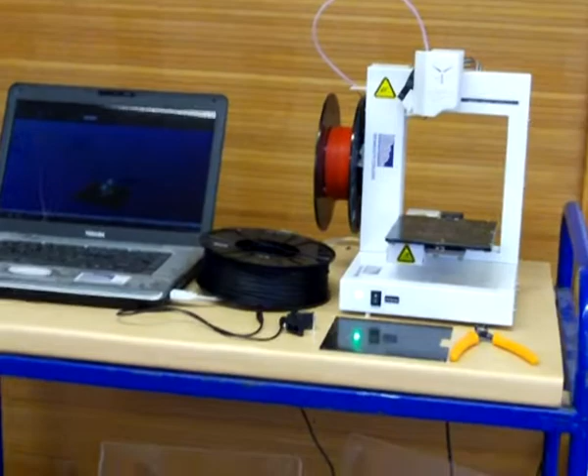Just going to have a go at making a little ad hoc film here about the Up Plus 2 3D printer supplied to us by Denford. We've got the supplied software here up and running on the PC.

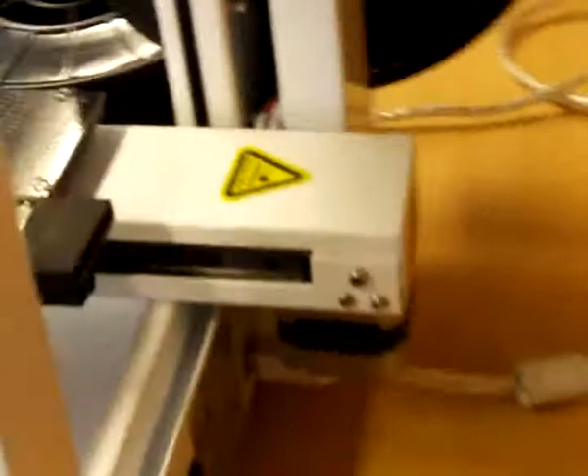What I'm going to do first is initialise the machine. What you need to do is turn it on at the back here, there's a little rocker switch. Okay, so that's turned on now. What we need to do now is go to Print and Initialise. You only need to do that once when you turn the machine on, and like all CNC machines, the equipment's going to run through homing its 3 axes.

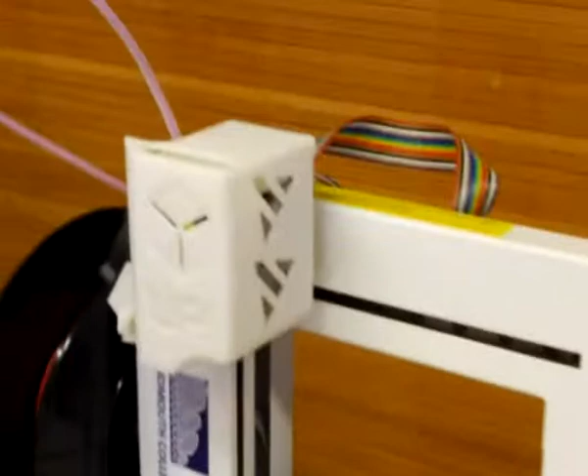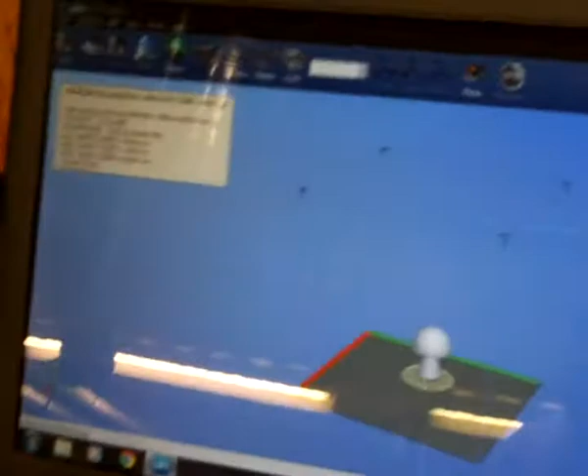Now I've got a couple of door handles here from a previous job. What I'm going to do is get rid of those. You click on them and then go up here to unload, and as if by magic they disappear. So that's ready for loading the next job.

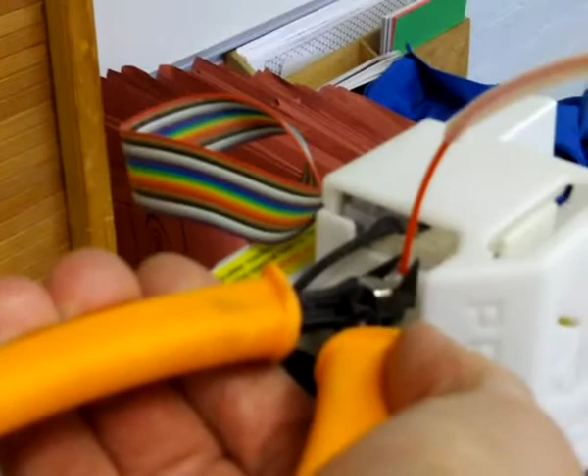Next, I'm going to change the colour. I've got red on there at the moment, and I'm going to change it to black. To change the reel, what you do is very carefully snip the material off here and remove.

No, I didn't want to do that, did I? Put a new reel on here. Not sure how this is going to come out, working one-handed and holding the camera with the other hand.

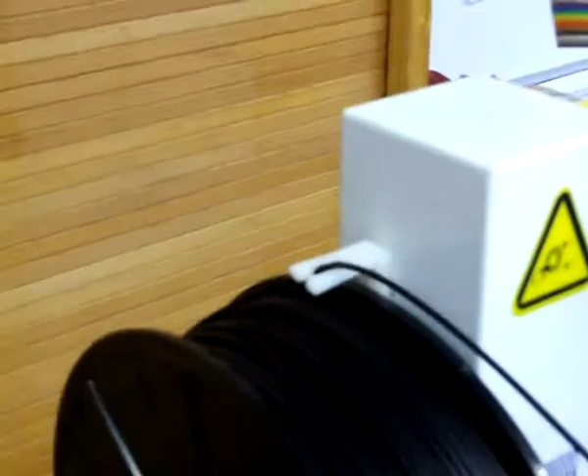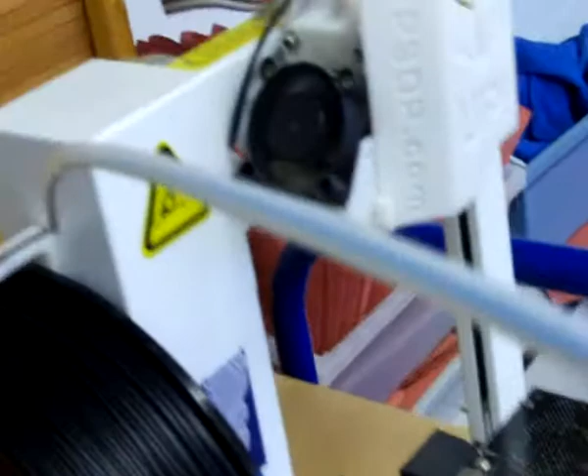We'll see. Got this thing here called a Bowden, and what you do is you feed that onto here. Excuse me while I just point the camera elsewhere. I'll feed that on. This is probably going to look really amateurish while this film comes out. There you go, look, I've got the new material and the Bowden here going back to the reel. Okay, fantastic. And if you look on here, there's the little stub from the red material that I cut off.

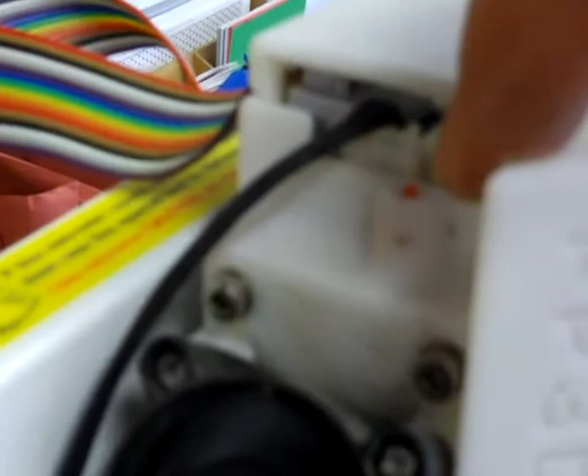Now, to get the new material to feed through the machine, what you do is you go onto Print here, you go down to Maintenance here, and then you click Extrude here. A little audio signal.

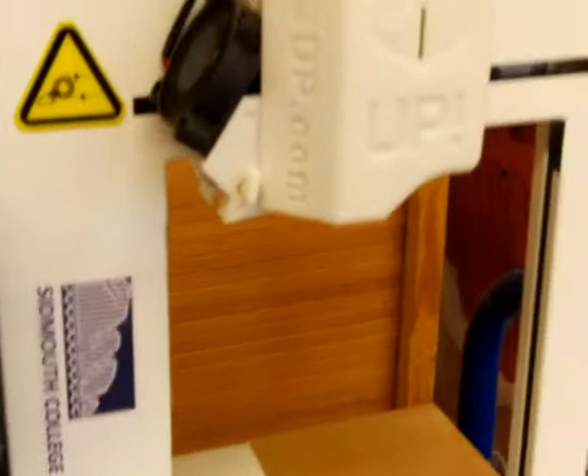Now we'll need to wait for a couple of minutes. What happens is the heater, the nozzle, will heat up here. We'll get an audio signal and the little piece of red material will disappear, and what I'll do is feed in the black material.

Yes, there's that old saying, a watched 3D printer never extrudes its material. I don't know if you've got that audio warning there. That's disappeared. And it's starting to extrude out of the nozzle here. So what we're going to do is get this little piece here and feed it in here. And in a little while we should see the red change to black.

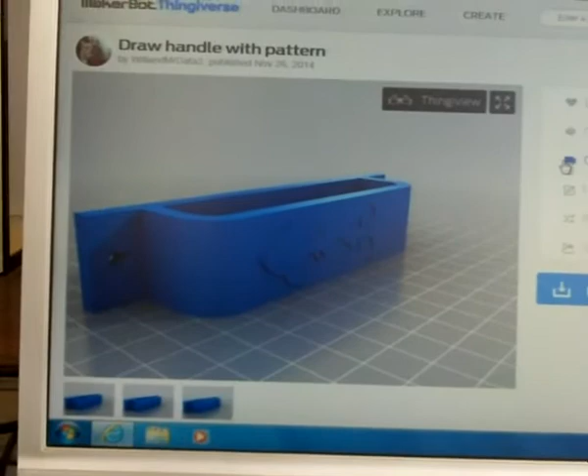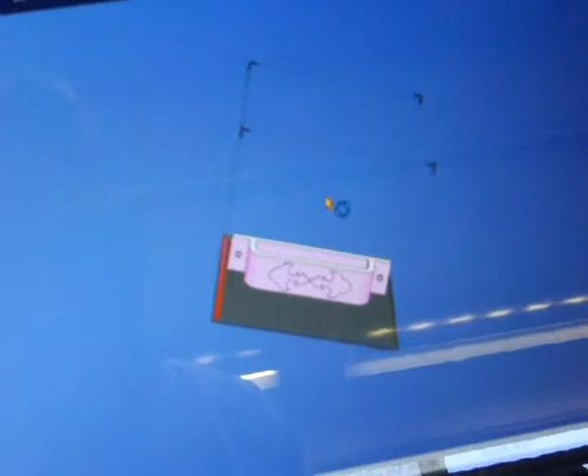I finally found the handle that the student chose, so I'm going to attempt to download this thing. What you're looking for with the Up Plus 2 is an STL file. Right, okay, I've downloaded the handle from the internet. I've uploaded it to this program here.

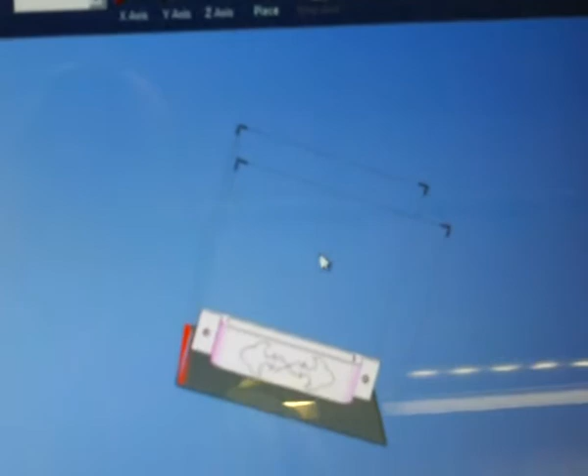So I'm going to print now. All we do is we go print. We've got some different settings here: normal, fast and fine, not very technical, but you get the picture. Click OK to that. I should get another little box open up in a minute.

Right, got this next box: 'Part material not enough, add more material?' Right, don't know what that means, but we just always click no, and things seem to work fine.

So that blue bar moving across there is the drawing being converted into the codes that will control the 3 axes on the machine. Got another little box here telling us the time it's going to take and the weight of the material, and what time it's going to finish. It's all clever stuff, so we click OK to that.

I don't think you need to click OK, I think actually it just does proceed. We can see here the nozzle is heating and the platform is heating. When they get to the prescribed temperature, we'll get a little audio warning and the machine will start.

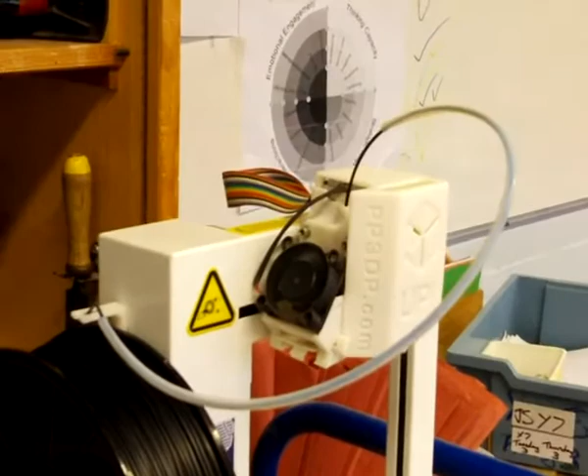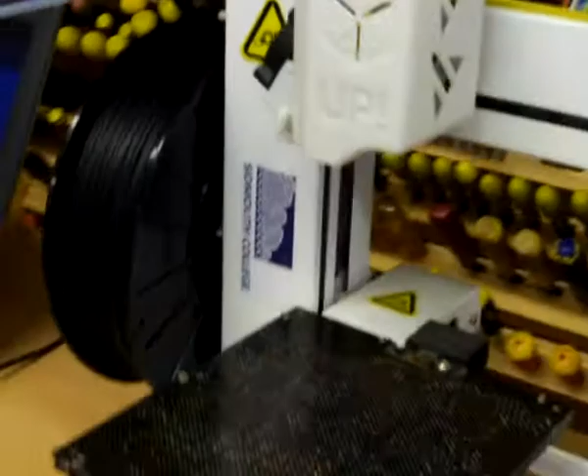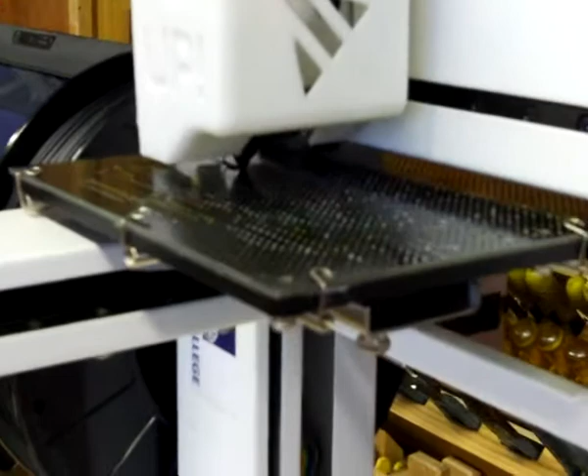Typical, the camera... oh no, that's it, that's good. I was going to say typical, the camera was switched off and we got the audio warning, but I remember now there are 2 audio warnings. Now I think what the machine does first of all is extrude a little bit of the material just here, I think just to get the nozzle unblocked.

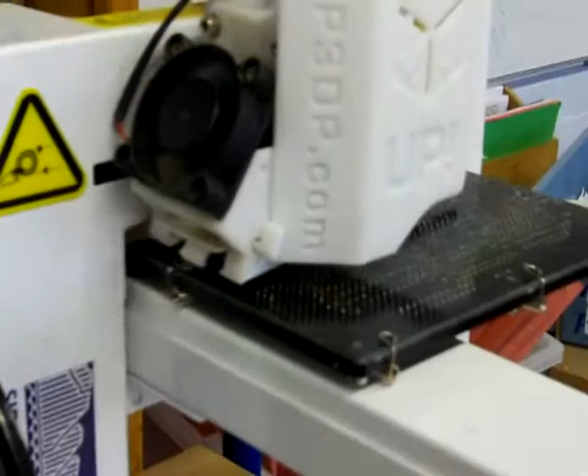Seems sort of logical to me. Now the machine is laying down a little base, which is quite loosely constructed compared to the rest of the material that extrudes for the actual handle or object you're going to make.

I believe it's called support material. This is what you get for your money in terms of a toolkit. Got a little pair of side cutters there, some Allen keys, some screws, washers and so on. We've got a little socket wrench here, a manual and something else.

Please read before opening. These are the bases that go on the heated table, you get 3 of those. Here's some bulldog clips, that's another method for holding these in place. There's various things you can do there to hold them. You've got a pair of gloves here.

I presume you get these because you get this really quite sharp scraper for getting your finished work off of these baseboards, you'll see that later on. Got a knife, that's not the original one though. A pair of tweezers, I added the toothbrush because you do need to clean some of the feed mechanism for the material. Don't get the toolbox, that came from Lidl, it wasn't very good though because I had to put cable ties on to stop the lids coming off.

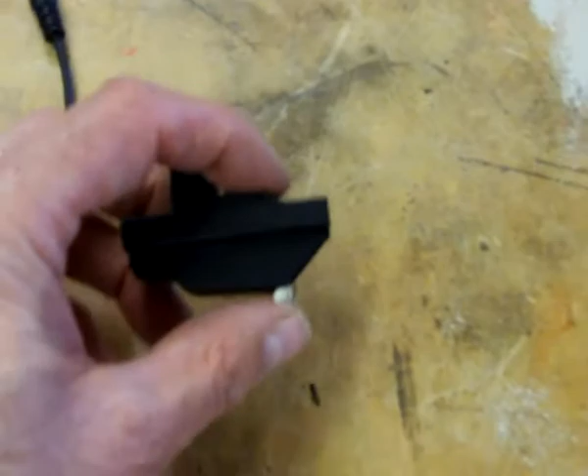It's got that little micro switch there, and imagine that's on the machine, I'll demonstrate this later. You plug this cable into it here and the other end into the machine, and then this goes around and touches the base, not quite as quickly as this though, in 9 places. And what I presume that does is any discrepancy in level, height, trueness, etc. is factored into the program.

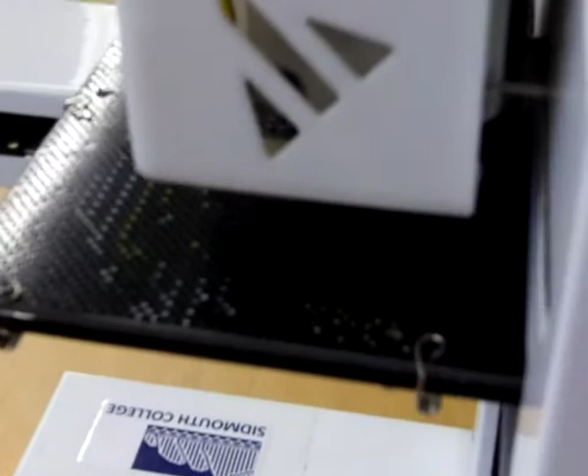Now this wasn't a really very good choice of colour for the demonstration, but I can see it's building this quite nice little base here. What I'll do is come back from time to time and take some pictures of the work in progress.

Here's just a few of the things that have been printed. This is Yorick, apparently he was a man of infinite jest. This little bearing thing here - believe it or not, this was printed assembled. That's just so fantastic.

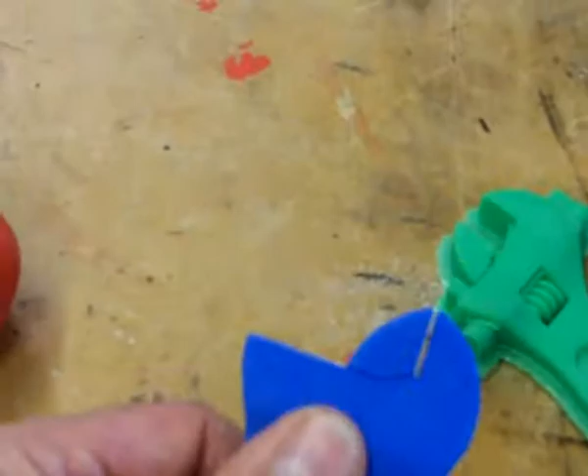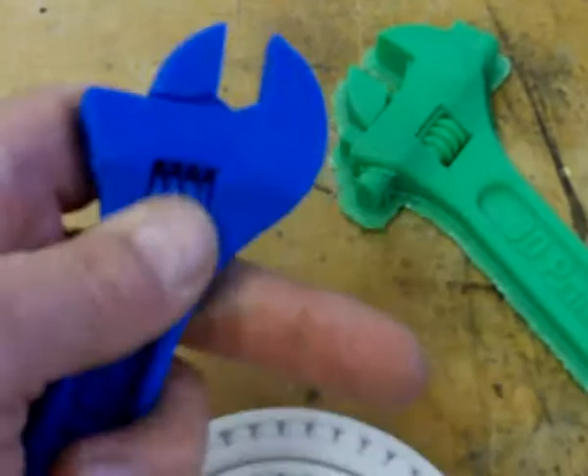Now look, you've got this support material here. Look, here we go, look - here's a spanner, an adjustable spanner. Look, that all works, again that was printed assembled. What you did have to do was cut off this support material on here. This is probably a better example.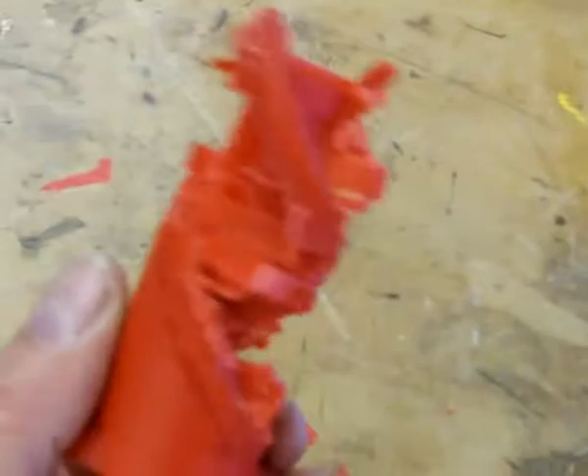This is DNA, or a section of a DNA strand, and look, it looks like a real mess here, but it's halfway through having the supportive material picked off. Carry on with that sometime. Got a hinge here. Okay, and my favourite, this little engine.

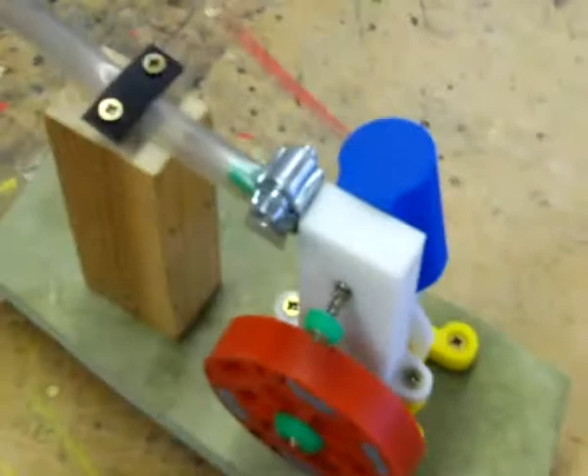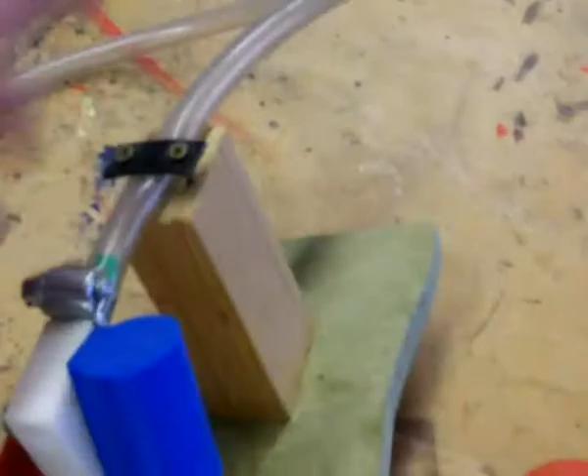Now all these parts were printed separately, then assembled with some screws and glue. If you want to see a video of this running, I think I've got it on my YouTube channel, or if you visit Sidmouth College you'll see a video I made of this. Now it seems so robust for what it is. Fantastic. These are just a few of the things we've printed out.

These are the spools of material. This is ABS, and this is what Denford call a rainbow pack - 1, 2, 3, 4, 5, 6 mixed colours.

Now I've got a little tip for you here. If you're getting to the end of your reel, what you need to be careful of, which I haven't read about or seen anyone else talk about, is the end of the reel is fixed into one of these little holes here - this one's actually come out. This makes absolute sense, because if they didn't fix the end of the material, they wouldn't be able to wind it onto the spool, would they?

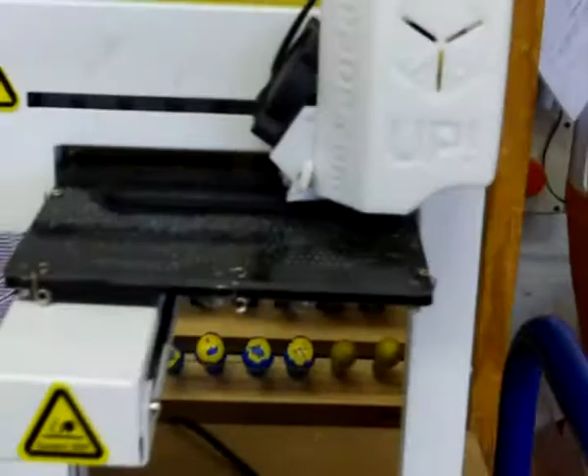Now that's all well and good. When you get near to the end of your reel, you could be halfway through a job, and of course there's the material feeding in through this thing which we call the Bowden, to here, and the reel's free to turn. But you can imagine when you get to the very end, it locks up, and what happens is the machine is going through the motions, but no material's being fed through. Just a little point to bear in mind.

It's the bell for lunchtime.

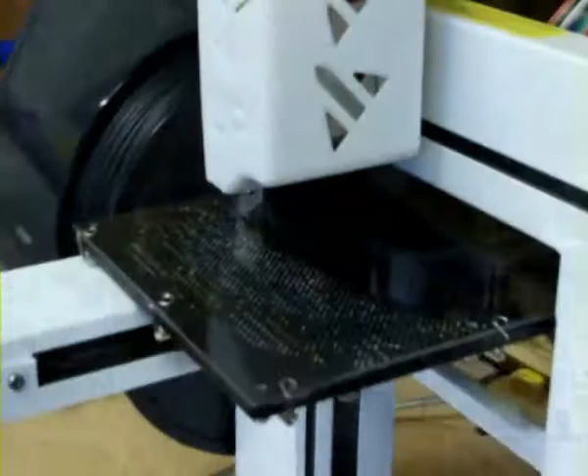This is the progress so far. I don't know if you're getting that - there's the lack of contrast between the table and the chosen material. That's after about an hour, I reckon about an hour and a quarter that's been running.

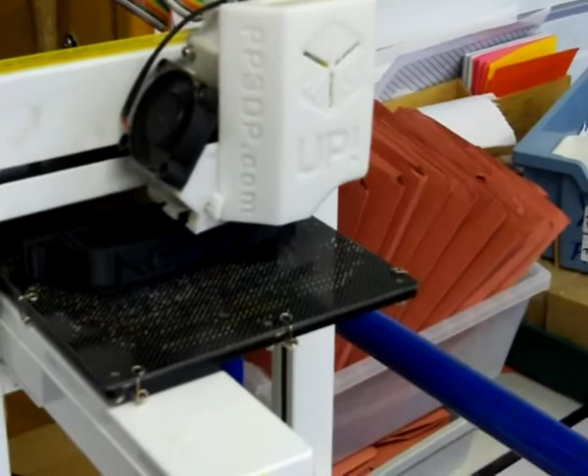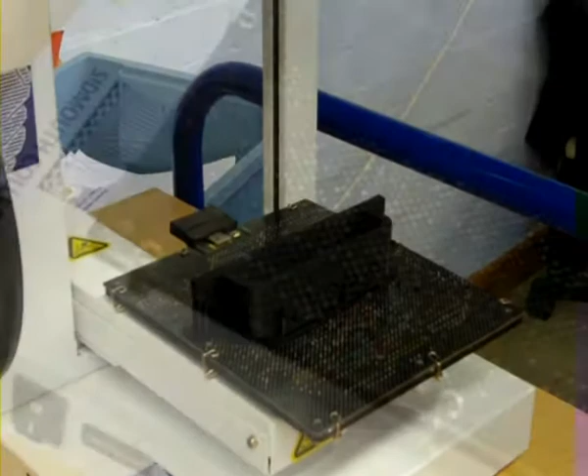Is it finished? Yeah. Are you sure about that? Yeah. Definitely? Yeah. Good. I'm now going to remove the false bed here, or base, or whatever, so we can take this lovely artefact off the machine.

There it is. Put it into the sunlight so you can have a better look. Can you see it there? There you go.

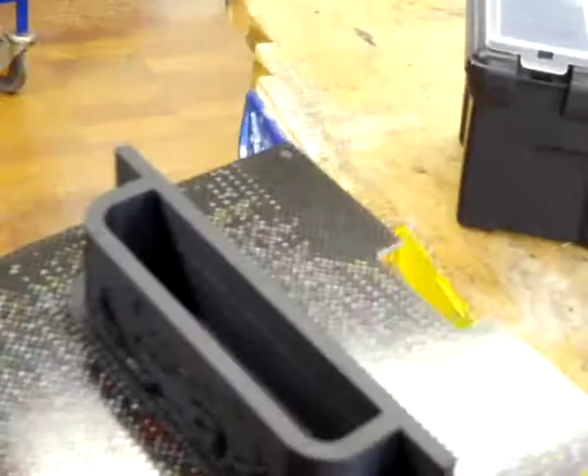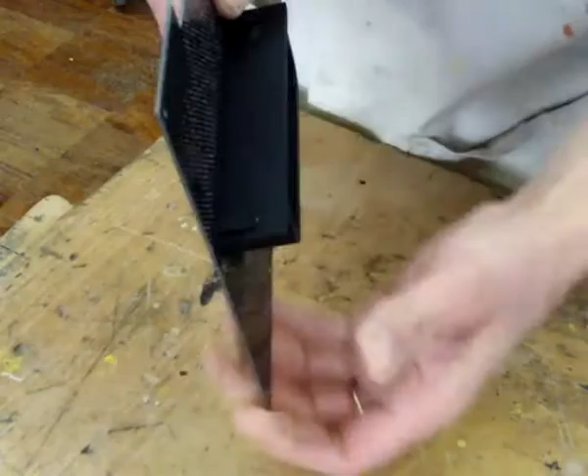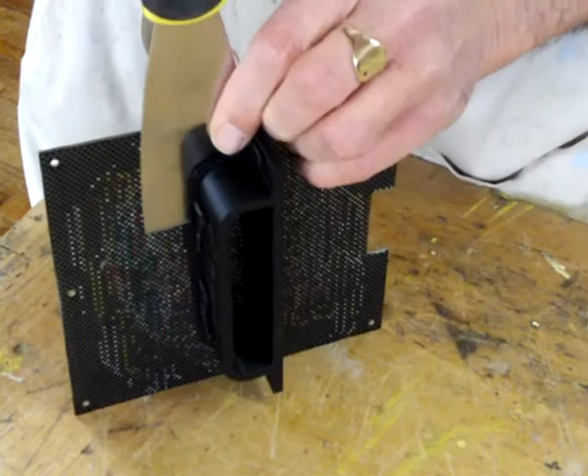Okay, now what I'm going to do here, I find if you give this a little bit of a flex, flex it a little bit, it starts to come off, and you can get the supplied scraper in the back here, and prise off your artefact.

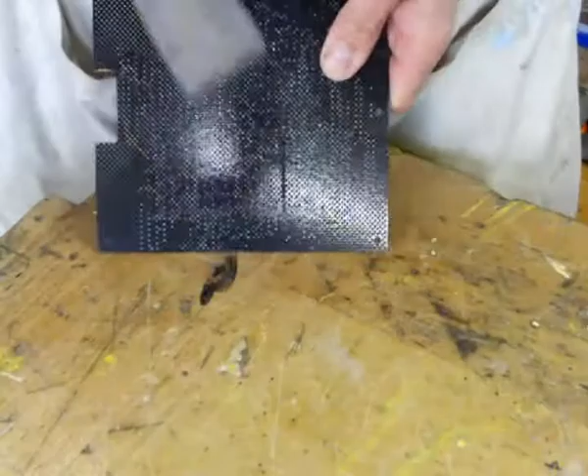What I do is give this a clean off, ready for the next piece. Okay, both sides, because some of the material comes through. There's loads of little holes in here, and some of the material pokes through, which is going to cause the bed not to be flat.

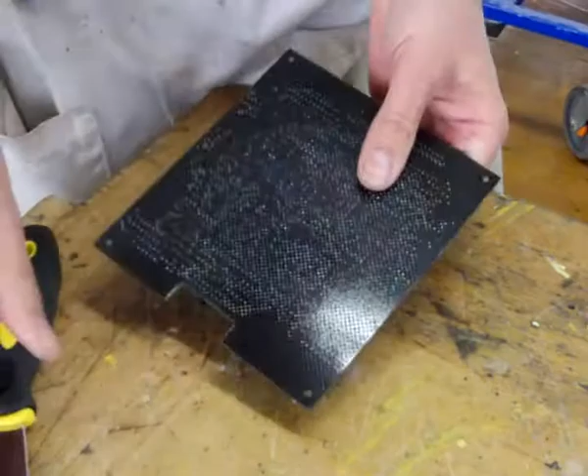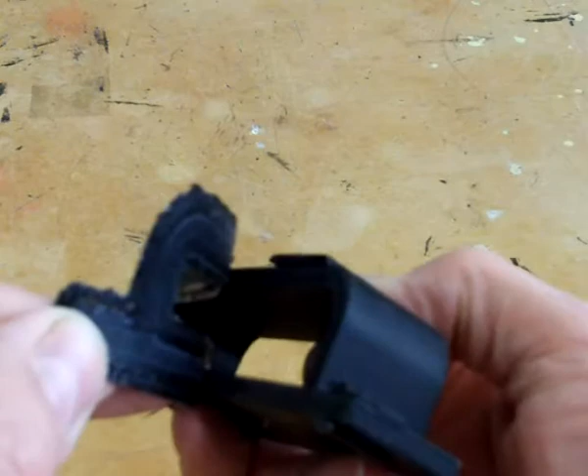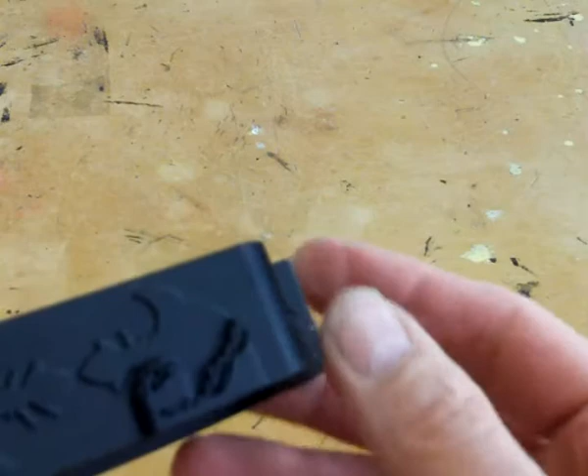Now, can you see that there is this supportive material underneath? It's coming off, and also this was printed this way up, and as you can see, this is a raised area here, but that couldn't be printed in mid-air, so it had to have this little bit of supportive material added, so that can now be picked off.

What you need to do is go right round, perhaps use the knife or even the scraper to get all these pieces off. I'll deal with that in more detail off camera and give you a shot of it on the finished piece of furniture.

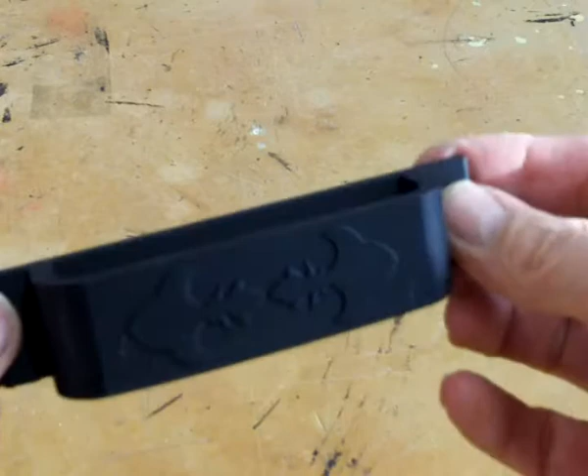Those pieces are actually there because there's a countersunk hole on the back of that. That's why those supportive pieces are there.

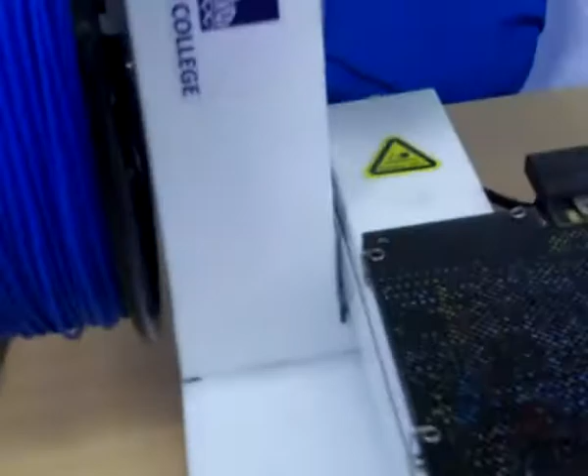I'm going to show you how to do the platform calibrate now and nozzle height detect. Got this little device here that's got the micro switch and a magnet, so what we do is plug in the cable supplied. You plug this in here like this. Again, I'm working one-handed. Make sure it's clicked right home. And this goes on just up under here.

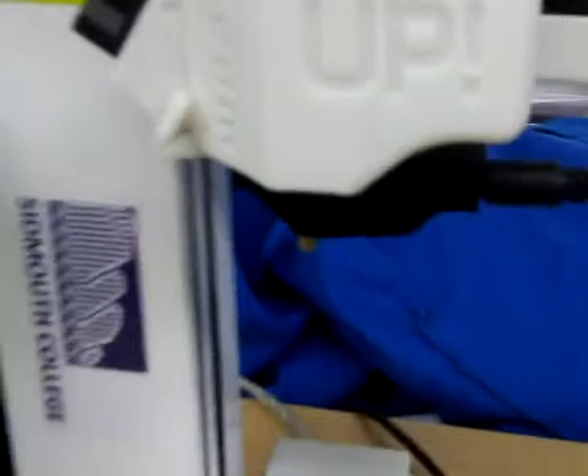You've got to make sure it's cooled down sufficiently, it tells you how cooled in the book. And then round the back here you've got a little port, and you plug the cable in here. Again, you've got to make sure that's fully home. I'm going to take it out of the shot to do it.

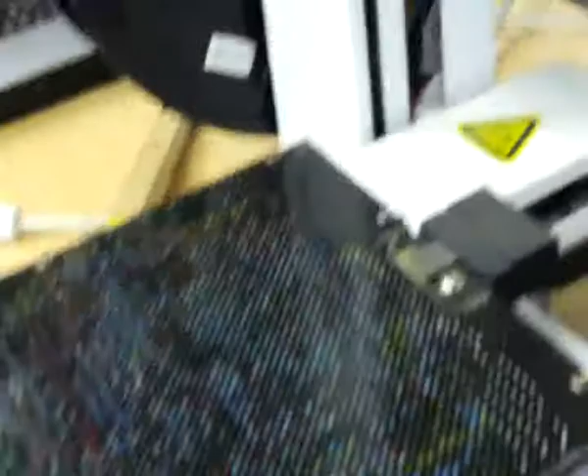There we go. Right, now then, what you do is you go on to prints, platform calibrate - oh no, that's wrong, quit without saving. It's not platform calibrate, it's auto level. Those two are very confusing, I think.

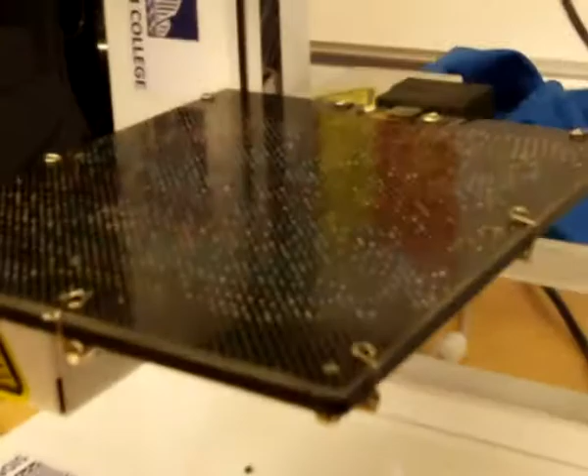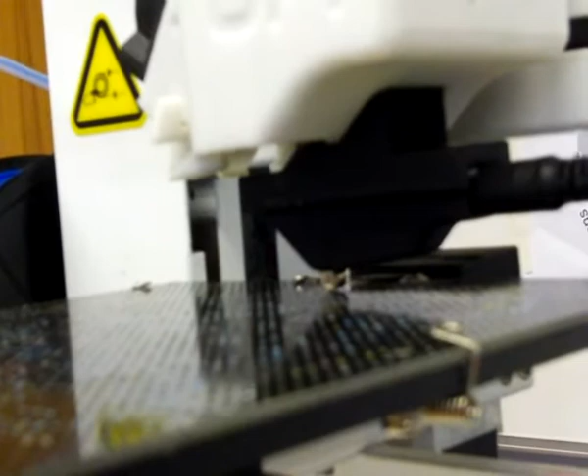Now then, the little platform is coming up here at quite a speed. Very cleverly slows down at this point. Then we get a little... it's going to do that in 9 places on the flat platform. Just coming up to the last of the 9 positions.

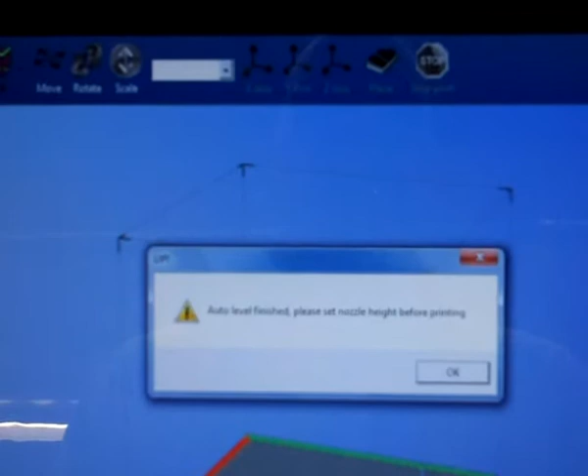Fantastic, I've got a little box here: auto level finished, please set nozzle height before printing. We're going to click OK to that and continue.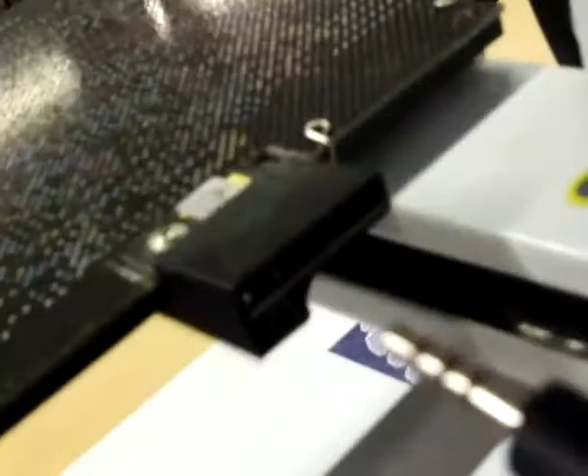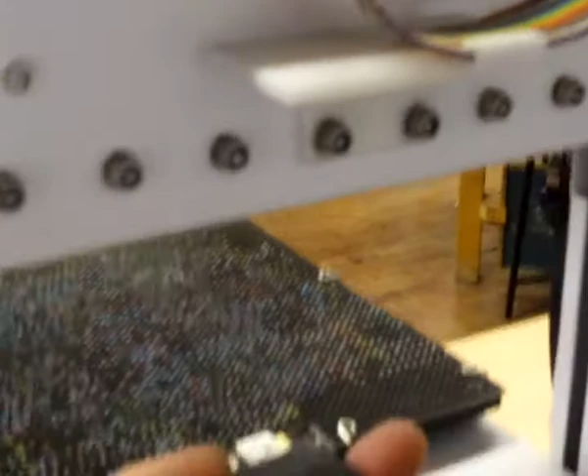So what you do now for your nozzle height detect is you take off the little magnetic micro switch thing, withdraw that, and that plugs into this little port here on the back of the machine. Again, I'm going to have to try to work it - oh right, it's got to be pushed right in. I think that's in, we'll put the camera down and make sure it is in. No, and it wasn't - it wasn't fully in, but it is now.

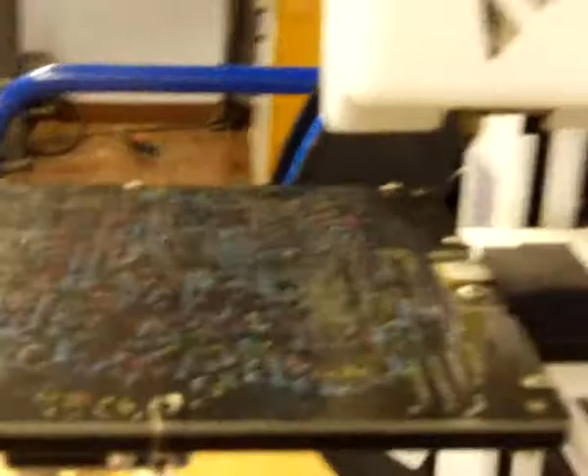Now then, see this little thing here? That is a micro switch. Okay, so what we'll do is we'll go over to here, and we go print, and we go nozzle height detect. The machine is coming into position now, and you can see the nozzle there just coming up really, really gently to that little micro switch.

Just actually had a problem with this, the material stopped feeding through. There you go, I have a little dialog box here, giving the height 136.77. I'm going to click OK to that.

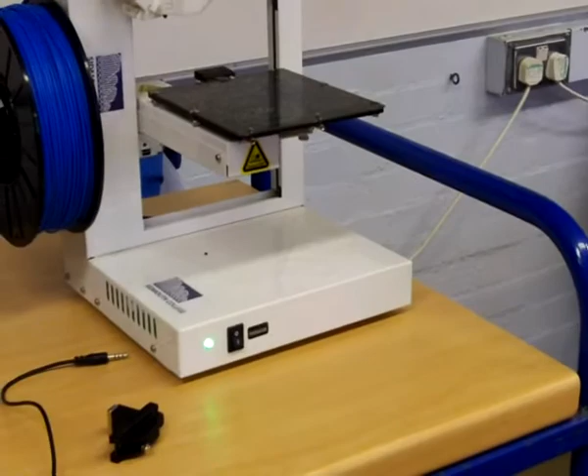I've removed the cable and the micro switch that detects the platform height. What I'll do now is run through all the controls and ports, because you probably might not have seen them during all the shaky camera action.

Right, around the back here we've got the on and off switch. This is the port here for the cable that I've just used to calibrate the platform. This is the power supply. This is the USB cable that connects the machine to the PC that's controlling it.

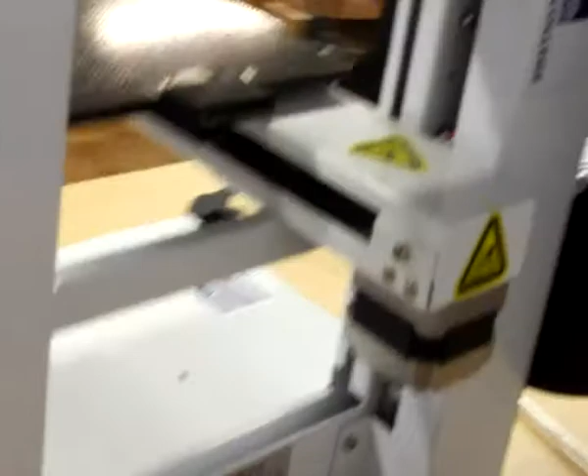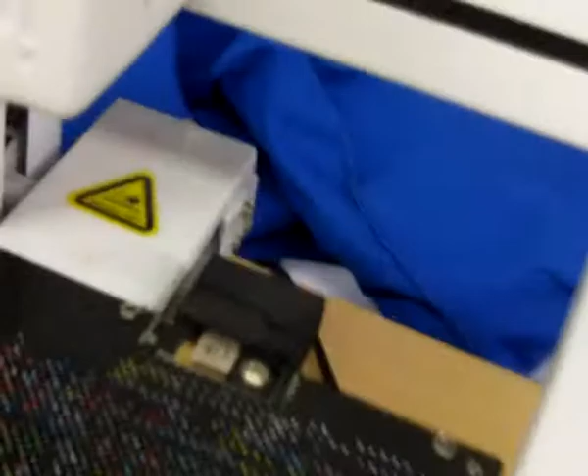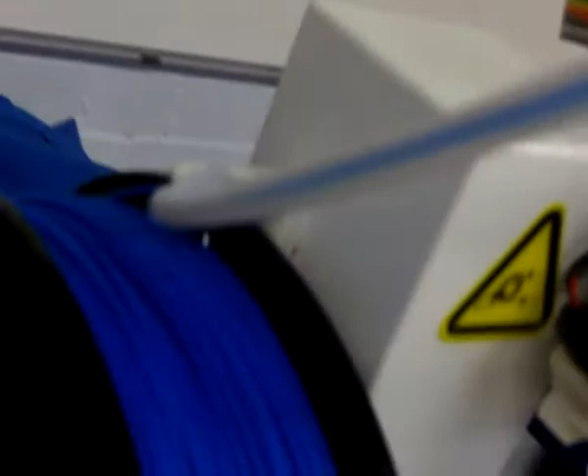You can use this switch on the hardware to initialize rather than the software. Here is the little micro switch for the nozzle height detect. This device here, we call this the Bowden. And I think that is probably about that.